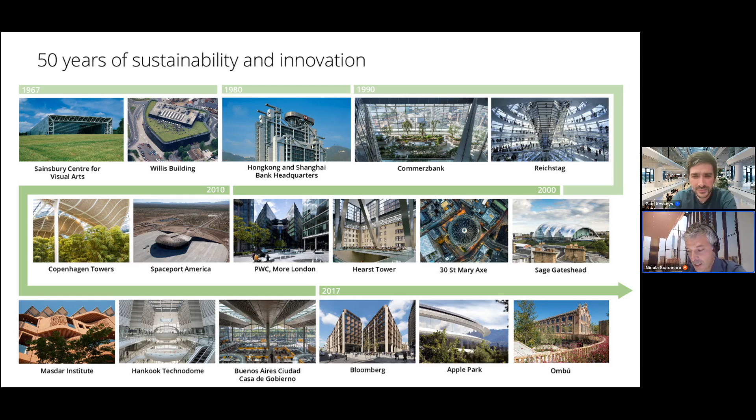Foster & Partners is a studio of architecture, engineering, urbanism, and industrial design, which was founded in 1967 by Norman Foster. Since then, the practice has been working on a wide range of projects, some of them illustrated in this small diagram here. The common thread, I will say, is that we always look for innovation, and also we always look how we can push the concept of sustainability in our projects.

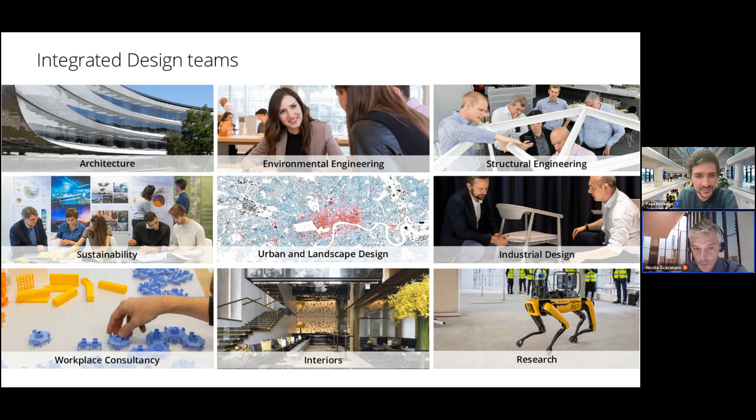Our headquarters is based in London. It's a very exciting campus. I usually call it a university almost. We have model making facilities, material research center, design studios, all sort of working together under one roof. And that's one of the key principles of the practice, the idea of having under one roof many different disciplines, because we think the best design comes from integrating design. That's pretty much the core, I would say, of what we do.

Within our offices, we've got many specialist teams, in addition to the architectural studios, that help us and support us in our daily work. It's incredible, I think, that in some project work the ideas might come from so many different directions and so many different conversations. Sometimes I would say the best conversation seems to be happening around the cafeteria with a coffee or a tea.

We have within our studios and within our campus architects. We have, as I said before, a material research center with material scientists, model making facilities, and all of this is accessible to all the architects, which I think is very interesting.

Looking at the practice, just to give you a sense of the scale, as I said, our headquarters is in London, but we have 16 offices across the globe, going from New York, Los Angeles, San Francisco, to Shanghai, Madrid, and as I said, London, where I'm based today for giving this lecture.

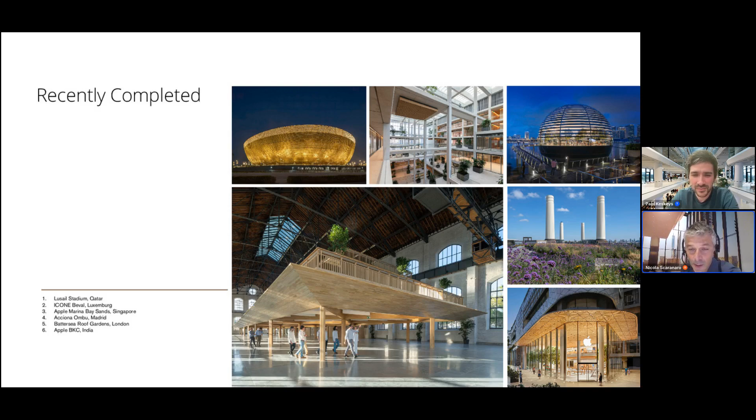Through the story of the practice, we've been working on over 500 projects. In the last couple of years we completed quite a few of these, including the Lusail Stadium - you've probably seen that in the World Cup final - the beautiful Marina Bay Sands in Singapore, the Apple stores, and also Ombú in Madrid. So a wide range of projects in a wide range of countries as well.

We have a lot of projects under construction. One in New York, which is very close to my heart, which is 270 Park Avenue, and Toronto, where we have one as well.

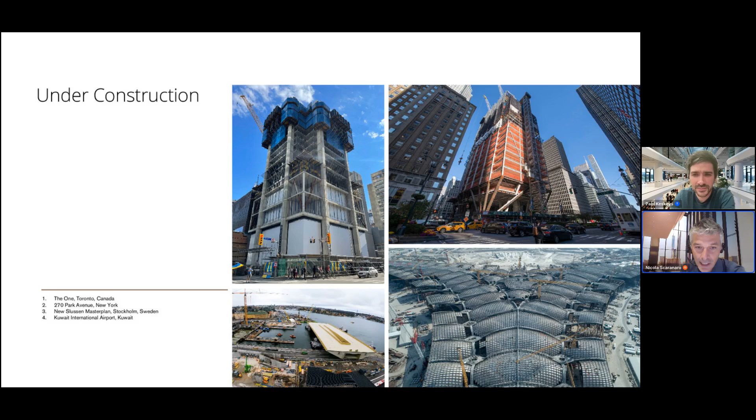And just to pick a few, we got the Slussen master plan in Stockholm, and the Kuwait airport, which is looking stunning now under construction now that the structure has been completed.

Today I want to focus on two projects to have the opportunity to go into detail. I'll show you images of the completed project, but also studies and sketches we've done throughout the process, to give you a sense of the energy and the way we work. I picked these two projects, one under construction, one recently completed, because I think they focus on three questions I posed to myself for speaking to you today.

First, how the cultural and environmental context of the building affects our design process, how we try to create a sense of place, how our intervention as architects can create a renewed sense of place or fit within an existing context, and ultimately how the project responds to its location.

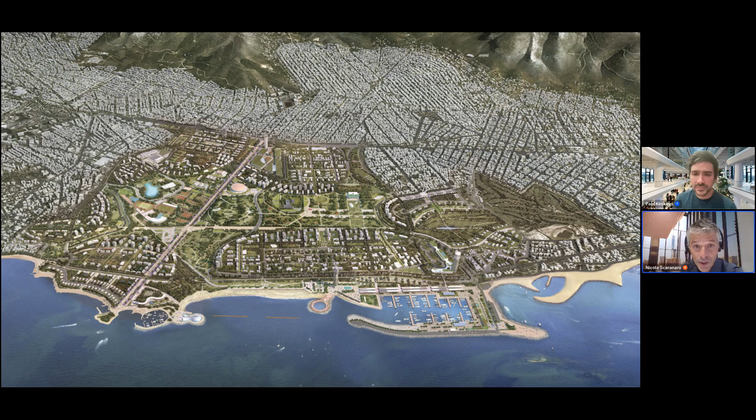Now, the idea of having a high-rise building within Athens, which is mostly low-rise, has incredible value for the project, allowing exactly what you see here: higher density, more efficient transport, and therefore more area for the public, both on the beach side and in the park you see inside.

So as we approached the project, what was our vision? We wanted to be inspired by the connection between the land and the sea in this incredible location, very close to the mountains of Athens, just in front of Aegina Island. We also wanted to be inspired by the Mediterranean color and quality of light, which generates very strong shadows and beautiful hues during the day.

But we also wanted to do something contemporary - we wanted to reinterpret the heritage of the city. One other thing we wanted to do, because of the connection to the marina and the sea and the view of the island in the distance, was create something that almost brought an island living style to the city.

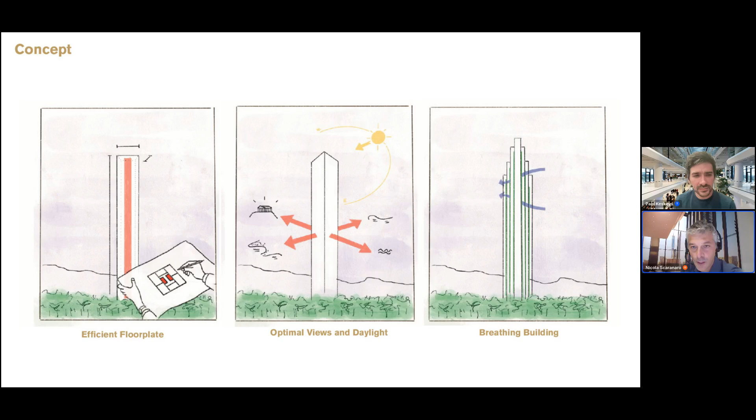So our approach was, first, to create an efficient floor plate that would create optimal views and daylight. So we rotated the massing with respect to the master plan, then started sculpting the floor plate to create what we call a breathing building - one that could open to the outside, but also have a dual aspect for every apartment within the tower.

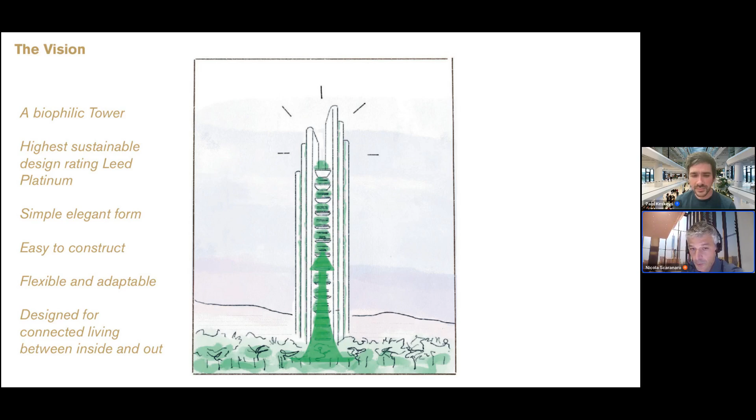Most importantly, because this tower is part of a great master plan, we wanted to create something that became the embodiment of the key principle of the master plan - the idea of creating a green park, a green spine, something that promotes the idea of wellness and biophilia, and the principle of sustainability, which I'm going to run you through.

And this was one of the images we developed for the detailed design of the project. As you can see, this idea of creating a spine running through the building really translated into creating almost a cluster of towers connected together by these bridges. For people who have been in Athens and know the way of living of Athenians, it's incredible because it really blurs the boundaries between what is considered inside and outside.

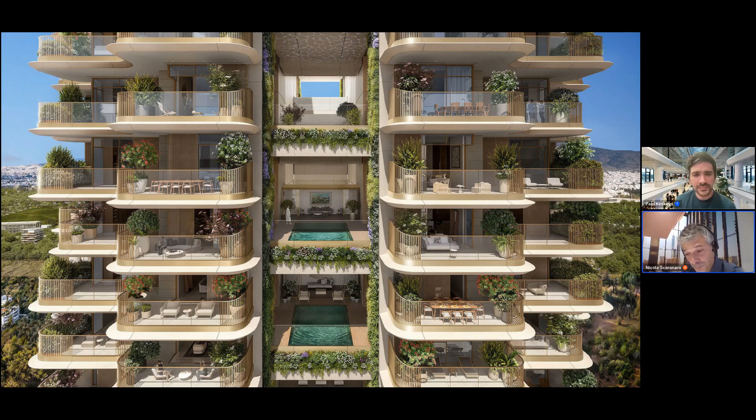Along this building, we created a series of sequences of terraces, which almost become outdoor living areas used during the summer. For us, it was very important then when developing a building.

We created something that responded to a few key parameters. First of all, since this is a quite tall tower, we're talking in the range of 200 meters from sea level, we wanted to create something that mitigated the wind. So all the design of the balconies with the balustrade, done in a mix of glazing and railings, is designed specifically to take off the energy of the wind and capture the breeze, which is important to create a climate that is cool and pleasant. We say that we can create a positive microclimate.

So we did a lot of studies with our in-house engineering team to understand what we can do in terms of creating a pleasant experience. How can we create outdoor spaces that are pleasant?

Again, the solution was to look at vernacular architecture and learn that having a mix of vegetation, a shaded place, the presence of water, and understanding the position of the breeze coming towards the tower, and making the most of the height of this building, creates a low speed wind effect.

We can reduce the perceived temperature. I notice in this slide we say between 3 and 5 degrees, but actually, having done more studies, we know that in the heat of summer we can almost reduce the perceived temperature inside the spine by 8 to 10 degrees. Pretty incredible if you think outside may be 35 degrees, but when you are in this space you may feel that it's absolutely pleasant.

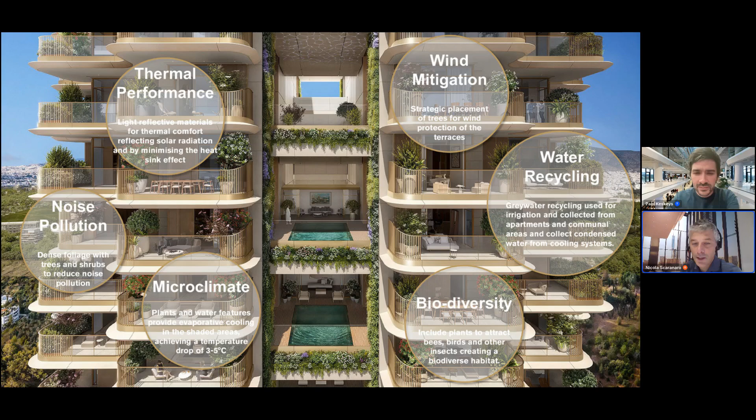And noise is very important too. We're in Athens, a very busy city, so the idea of creating these overhanging balconies that provide shade, and also the materials we use, were all designed to reduce the noise coming from the city itself. And if you look at the tower, it almost looks like a standalone tower, with no other high-rise building next to it.

So there was a desire for us to create something that looked like a cluster of towers coming together. What's quite interesting for us was the idea to create an opening between these two elements, where you can see these hanging, floating terraces, through which we can see the sky. We thought that was quite interesting in terms of the aspect too.

This organic aspect was also designed, as I said before, to manage and reduce the wind speed and actually capture the breeze where we need it.

In terms of the overall strategy, we also wanted to have something that reduced consumption. So we wanted low embodied carbon, and also wanted to reduce the overall water demand, which is critical in Athens. Something very important as well was to have a 100% naturally ventilated building.

These are some aspects in design that merge with ideas from the principle of biophilia, which we think will really promote the well-being of the people who live in this building. As I said before, since this competition was done in lockdown during COVID, something we almost forgot now, there was a very strong focus for us to promote healthy residential living.

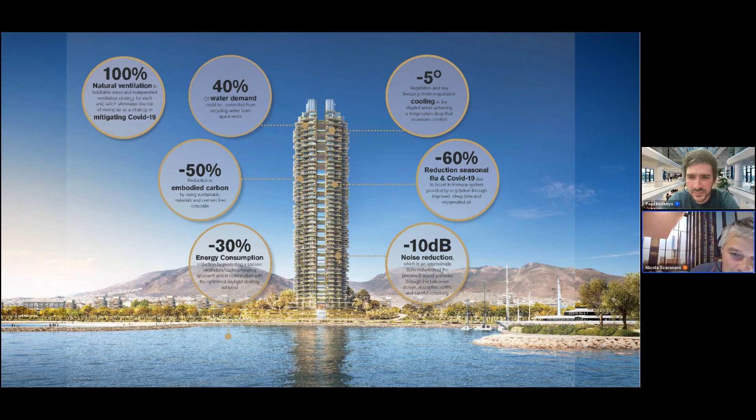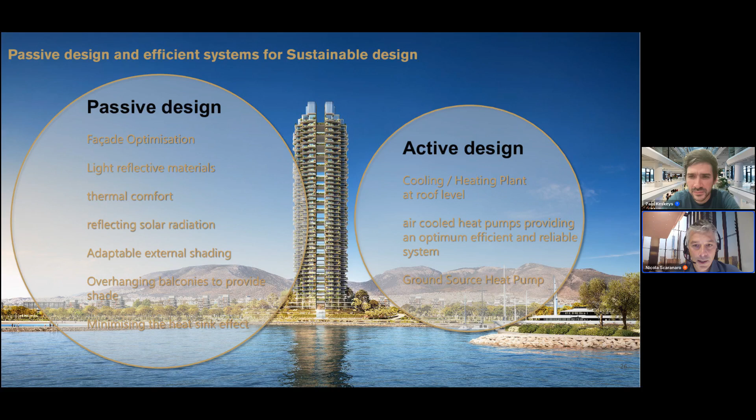And then also, in terms of engineering, we wanted to use both active and passive design to make sure that the performance of the building was as sustainable as possible.

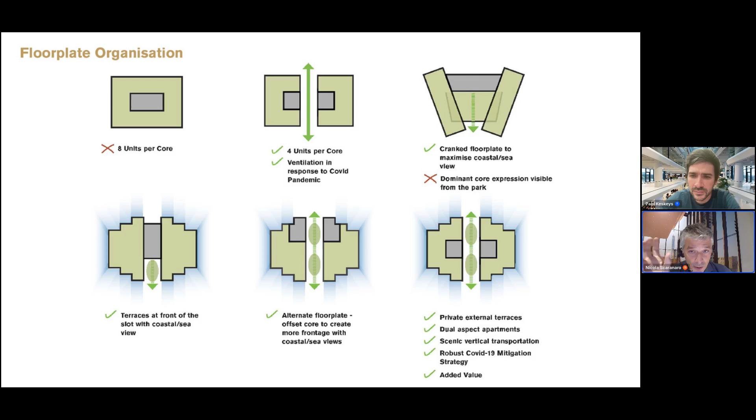The process for us was looking at different articulation of the floor plates, position of the cores, that ended up - from, I would say, the most efficient units per core shown in the upper left-hand corner - to our final layout and footprint of the building, where it provided both privacy for the terraces, dual aspect apartments, and also something quite interesting in terms of vertical transportation. This building behaves like one building in terms of fire escape - something quite important for a high-rise building, providing a high level of redundancy, so the two cores are connected. But in terms of vertical transportation and the experience of people accessing the building, they are almost two independent buildings. Structurally, this idea was very interesting to us.

Athens is highly seismic, so we wanted to create something - in terms of the footprint of the building and the structural design - that reduces the carbon footprint, the concrete carbon footprint. This idea of really maximizing the structural footprint, as you can see here with those connecting elements, really pushed us toward reducing the carbon footprint of the project.

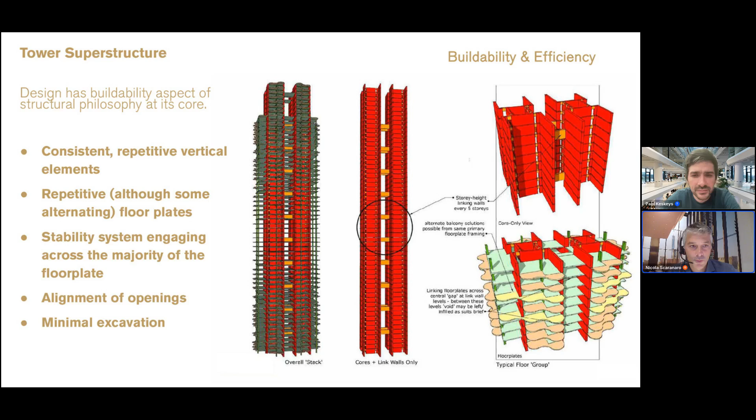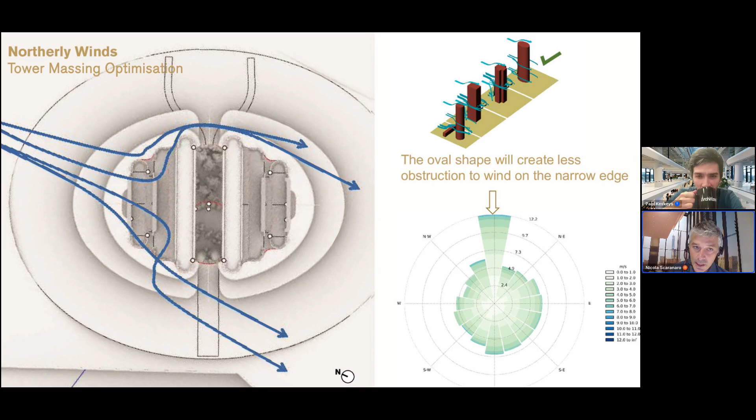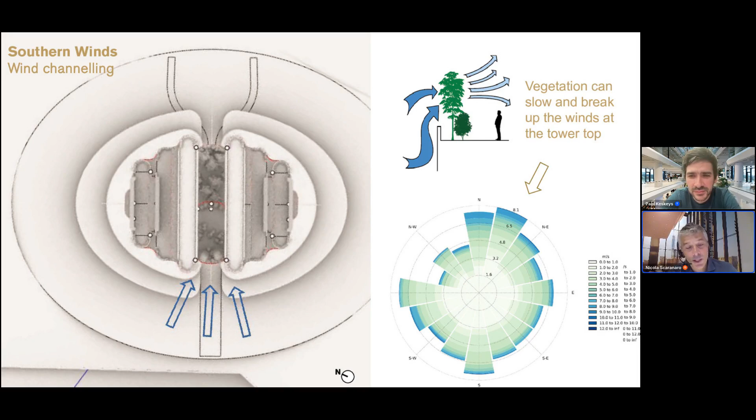As I said before, we did many studies, both desktop studies and fluid dynamics, as well as wind tunnel tests, to test not only the wind load for the structure of the building but also the comfort level at the different floors of the building. Athens is quite lucky because it's a coastal city which doesn't have high humidity, so capturing the wind and the breeze was something we realized very soon would be positive for comfort.

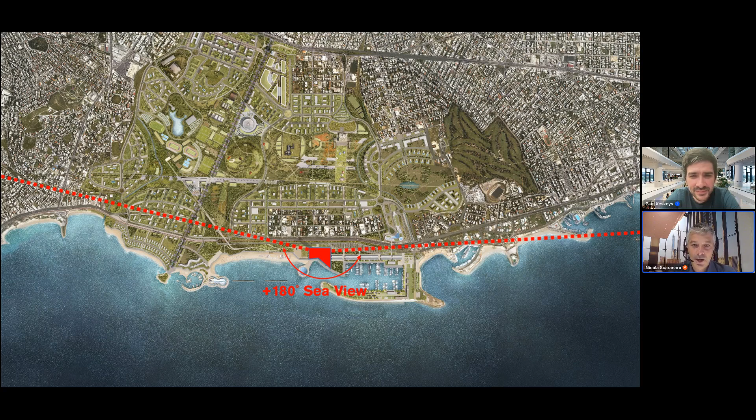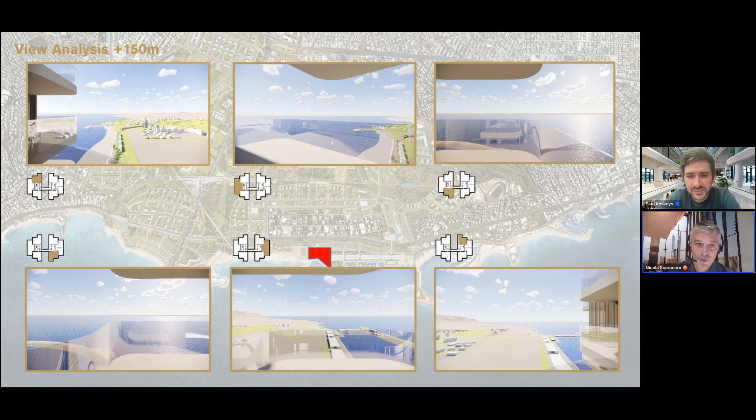Because of the position of the building, which spans almost 180 degrees across the coastal front of the city and also faces the mountain and the Acropolis at the back, the idea was to maximize the views across the city itself from the different rooms and living rooms of the apartments.

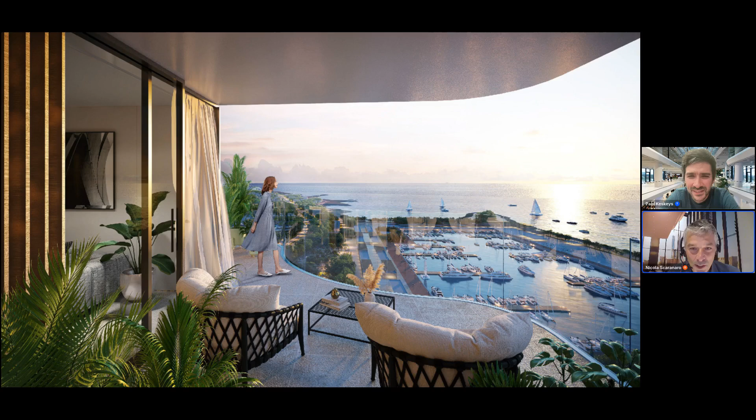Here are some early images we did using real drone footage, and you can see how incredible the city of Athens is - on one side the turquoise color of the Mediterranean Sea, on the other side the dark color of the mountains and rocks, with the city of Athens, consistently white, almost organically growing on the mountain itself.

Just next to our project is a beautiful marina, and we wanted to create a visual connection with the marina itself.

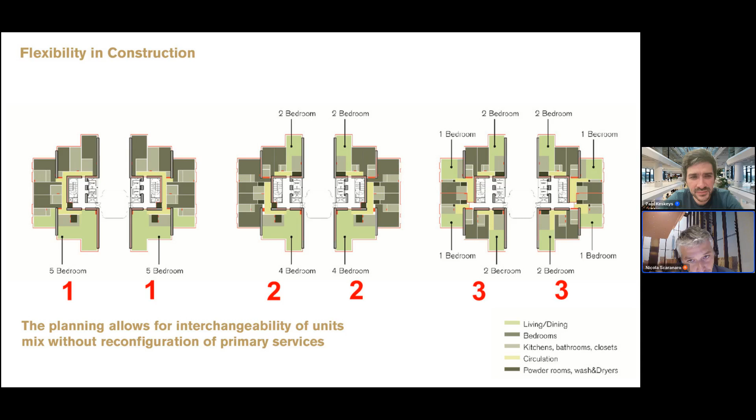It's important that when we think of our building, we don't just think of it on day one, but consider how it could adapt to different needs in the future. So it was very important for us to create something flexible in construction, with the possibility to change or combine units. We wanted to create something that could adapt across all courses of life - apartments that could be adapted for senior living as well. Flexibility in unit mix and design was incredibly important to us.

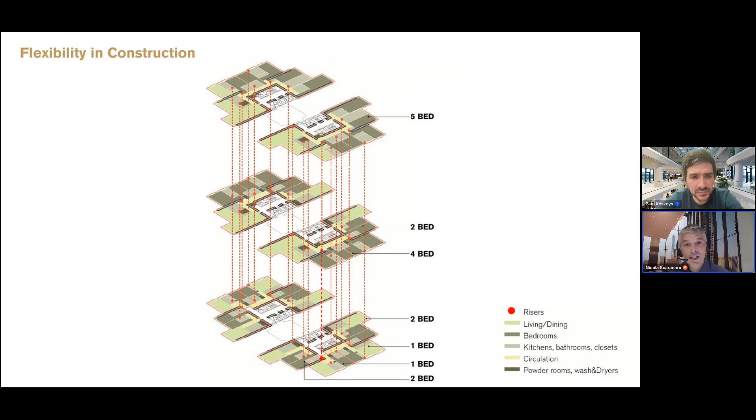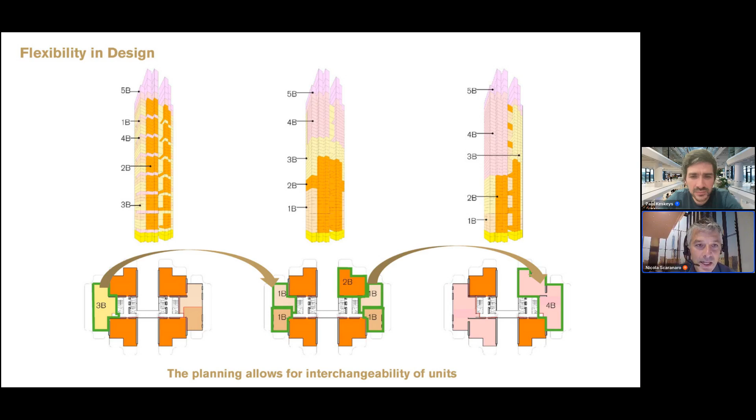It was also very important not to create a series of stacked units that were all the same, but to mix them. We wanted larger family units of four bedrooms, mixed with one-bedroom and two-bedroom units, or larger units taking up the full floor, creating a very interesting stacking mix. As we designed through this, and based on the market's reaction to our design, we were able to adjust the building in different ways to create an interesting mix.

If you go to the typical floor plan, here it is. As I said before, you can see two sets of stairs connected with bridges, linking the cores. Those bridges also work as linking beams that help connect the two cores structurally. You can see the shear walls extending to create a very solid footprint.

We can resist the seismic loads for the building itself, and then a two separate core in terms of lifting and goods lift, serving each half of the floor plate.

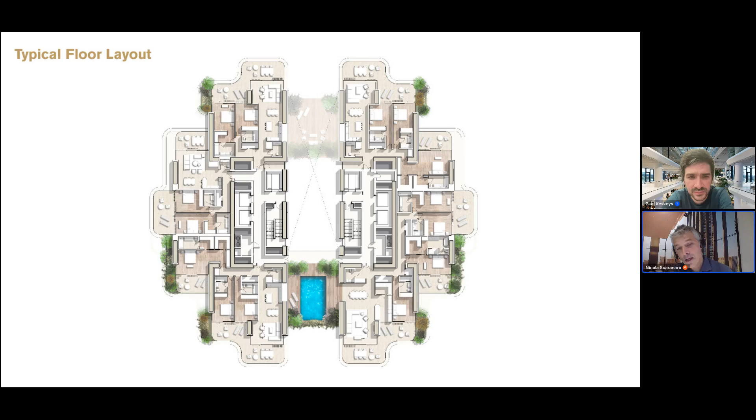This is a floor plate where you can see a mix of 3-bedroom, 4-bedroom, and 2-bedroom units, but some of these units themselves are entire half floors or even full floors, which are quite exciting.

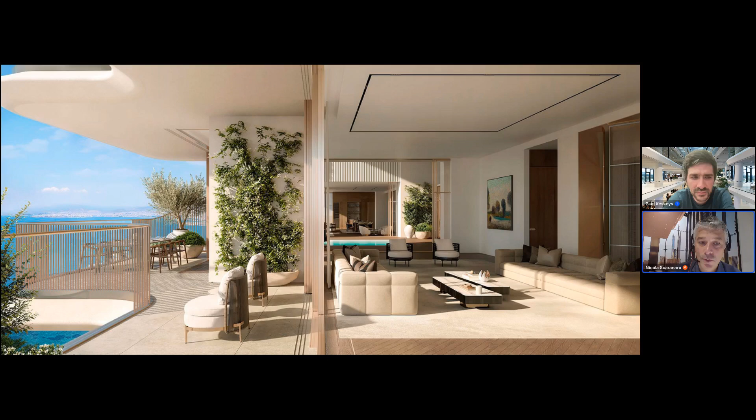One key design principle was to create something that could blur the experience of being inside the building versus outside. All windows—the building is very solid because it's important to the performance of the envelope—but towards the views of the sea and mountains, we created beautiful triple sliding doors which completely open up to blur the inside and outside.

This ensures natural ventilation is maximized throughout. This is a view looking backward at the central spaces floating in the center of the building. The idea was to create a very strong connection with these plunge pools to the Mediterranean Sea beyond.

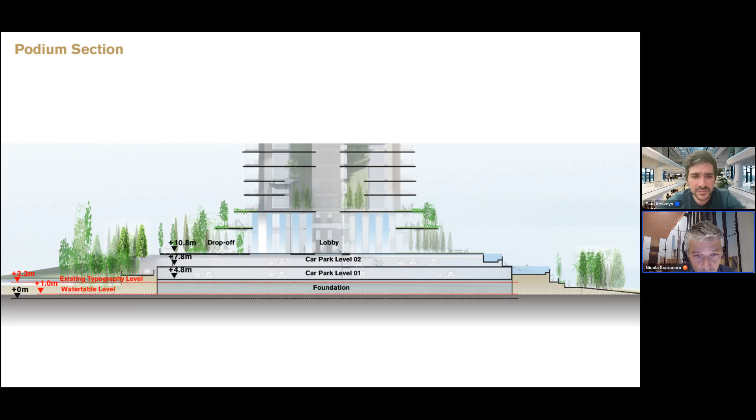The building sits within these wonderful master plans, very close to the beach. What we wanted to do here was reduce the excavation of the building, raise the car parking level to ground level, and this gave an opportunity to have the lobby level at plus 10 meters above sea level—which we thought was great for creating an opening, a spine in the center of the building, all the way to the arrival experience for residents and guests alike.

As you can see here, you are elevated, so you get a view directly towards the sea, and to the left and right you have the lobby dedicated to your portion of the tower. Also on this floor, we created a series of amenities—resident lounges, gyms, small business centers, and a swimming pool area.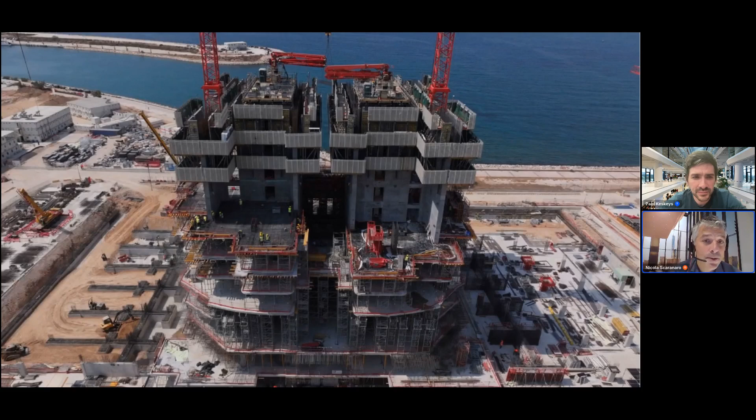Again, you get a very strong connection to the outside and to the landscape all around the tower. This is in construction, due to be completed in 2026, so quite soon. This image was taken a month ago on site, and you can see the building has almost reached the 8th floor.

It's quite interesting—despite having worked on this project for many years, every time I look at pictures or go on site, it's the proximity to the sea that strikes me. It really feels close, and sometimes you see boats just passing by the building, which is phenomenal.

The next project was about exploring how local culture and environment shape our building, and I hope this building in Athens achieved that. We really looked into understanding how Athenians live, the environment, and the local vernacular architecture, to create a quintessential Athenian living experience, hopefully.

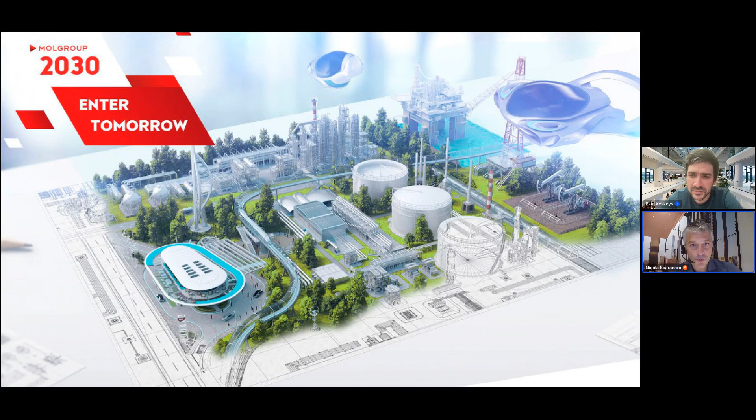This project is located in a different part of the world—in Europe, in Budapest. It's a campus project which has been recently completed. When we first approached it, there was a design competition, and when we were first approached by MOL, we thought the brief was very interesting.

MOL is a petrol company based in Budapest with a great vision for 2030, focused on investing in sustainable technology. To change the business and invest heavily in this new direction, they wanted to create an office that brought creativity and innovation together.

They wanted an office which changed the culture of working that they had.

But the building itself, apart from that fascination, what we found was most of the incredible work being done was done behind closed doors. So we thought, in a way like I described how we work in our office, where we collaborate across different disciplines, we wanted to bring that attitude of collaborative work and innovation to the new headquarters.

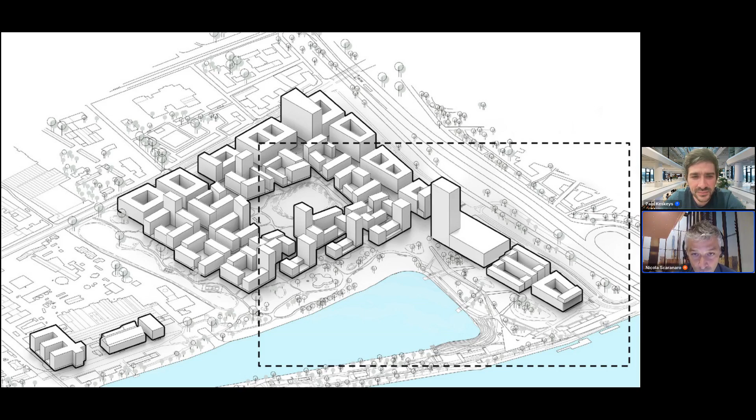This was the master plan which was created and approved for the site, given to us as a starting point for the competition massing.

What we thought looking at the site is that it was very interesting, because having such density in this specific part of Budapest is positive - there's a lot of good transport connectivity, and therefore an opportunity to reduce the carbon footprint of employees by simply placing the building very close to the transport hub.

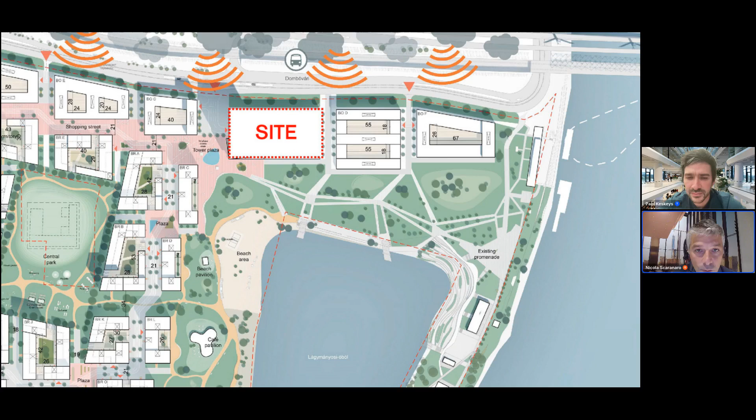That though has some issues as well. Being close to a big transport hub brought some noise from the connecting road. So we wanted to orient the building to almost create a screen, a barrier towards the noisier street, and open up toward the city and the river itself.

The other thing we wanted to explore was this idea of creating collaborative working. I personally feel that the most interesting conversations you have with colleagues might not happen exactly at your desk or in a meeting, but in different spaces across the campus. So what we wanted to bring here was a range of different amenities - a generous lobby at the entrance representing the company, collaboration spaces, gardens, a beautiful terrace on the Danube.

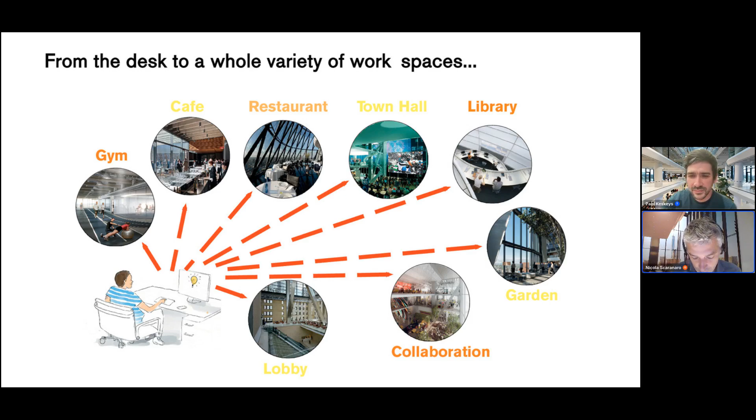We thought it would be interesting to include a restaurant, food and beverage places, a gym, a library, and a town hall. All these places could cater for different events and bring together the community, giving the opportunity to create a shared ethos.

What's also very interesting and important for us is that people are very different - some people are more introvert, some people are more extrovert, people have different needs. So we wanted to provide a range of choices for people to work.

Some tasks might require being very focused - if you're a programmer or software designer, you might need long stretches of time to focus in silence. Other tasks, like architecture, can actually be quite loud and require bigger groups for discussion.

So we provided different spaces for different tasks, but also for different types of personalities - we thought that was quite important. You can see we started stacking these spaces in this diagram, creating something that deviated from the massing of the consented master plan, to create something more fluid between the different spaces. Our initial thought process was: we have office and amenities we need to provide, so let's merge them together.

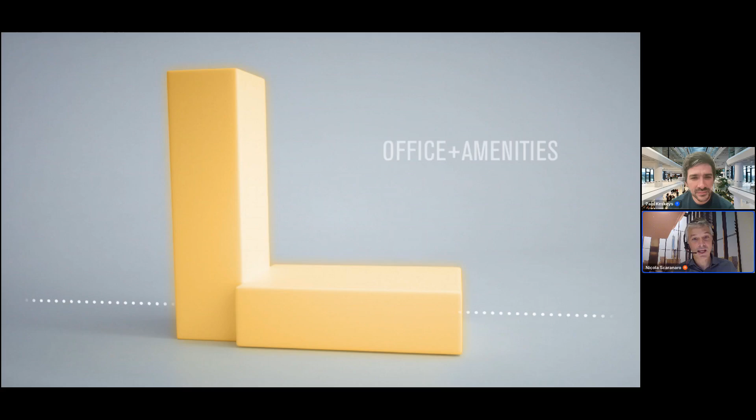The idea was also to take the core, which typically sits in the center of the building, and push it to the west. This has two benefits: one, it gives a more visually open floor plate, and secondly, it screens the western sun, which for an office building is considered rather unpleasant.

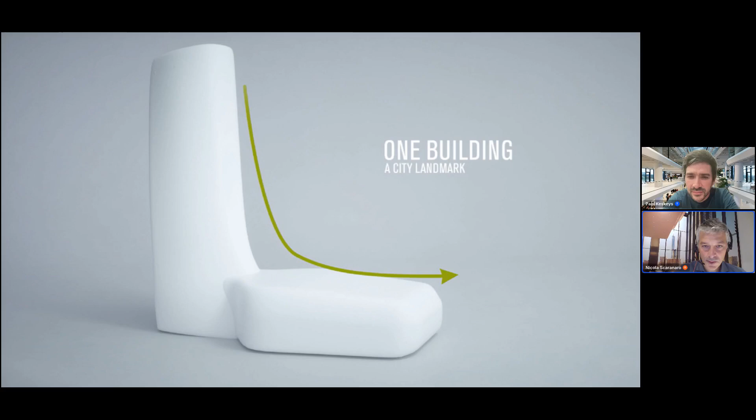We didn't want to have two buildings. We wanted to have one building coming together with this element. We thought this could become something inspired by the city landmarks. If you're familiar with Budapest, the catenary roofs, the hills in Buda, all have this sort of organic language, and the inlet where our building is situated has this nice organic language too.

Finally, we wanted to create a sort of vertical campus. So even if you sit with your team on different floors, we want to create visual connectivity across the full campus. Therefore we created these central winter gardens and this atrium which connects the different floor plates up to the top of the building, where we wanted to create a public space accessible to all.

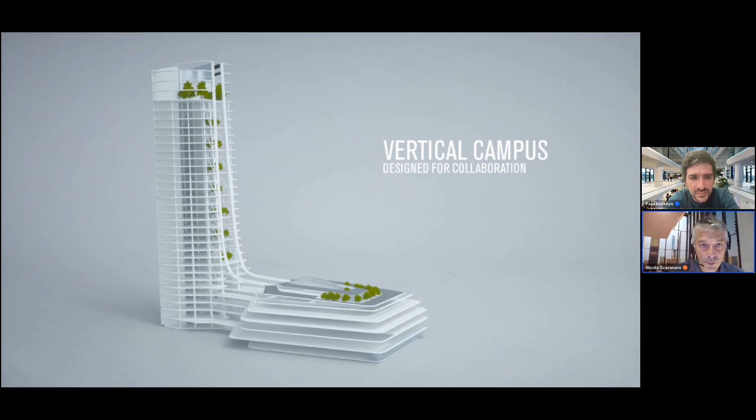Another thing which was key for us is to use these spaces, these winter gardens, to really boost the mid-season daylight and also the ventilation.

This is one of the early images we created. As you can see, the idea, as I described before, almost takes the language of this beautiful inlet in the Danube and transforms it into a vertical expression of this building. Then we have this green series of spaces that come to the terrace at the very top, which is open to the elements.

Looking at the distribution of spaces, you have a more typical floor plate, approximately 1,200 square meters, which sits in the tower, versus something quite unique - a working space in the low-rise portion on the podium of the building, with this big atrium coming through.

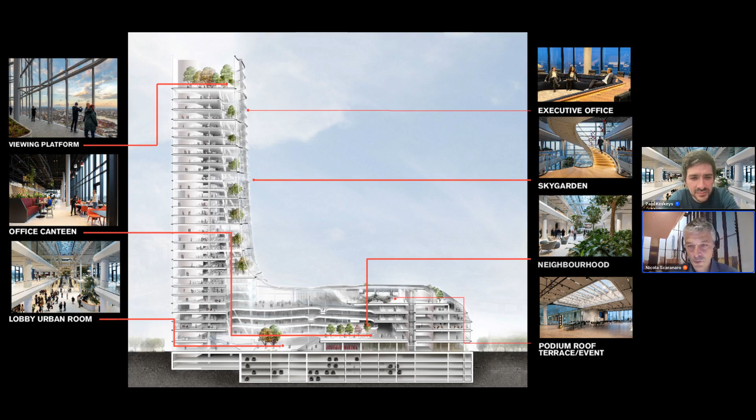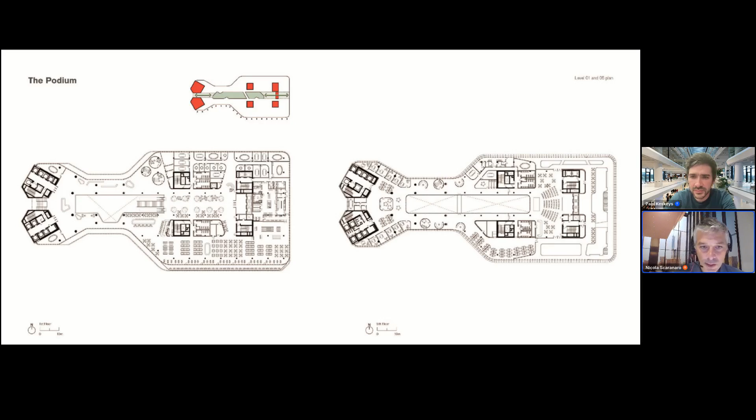Looking at some of the plans, just to give you a sense, you can see the dimension of the atrium in relationship to the floor plate, and the idea of creating the darker spaces of the floor plate - places like the town hall, event spaces, and some meeting rooms - towards the north, where we've got the noisy road, and putting the canteen and open places toward the south, with a great view of the river and better daylight.

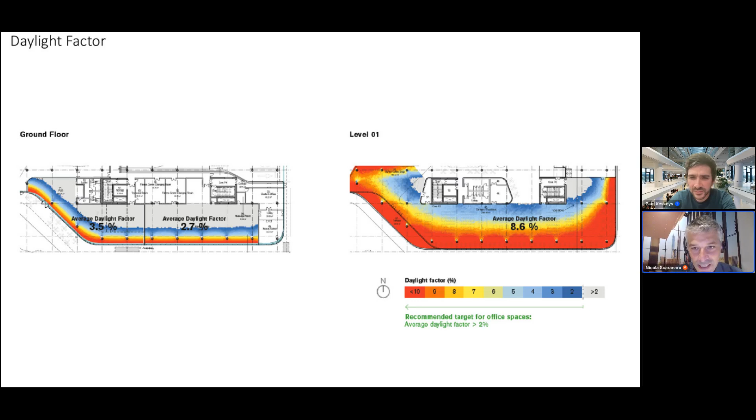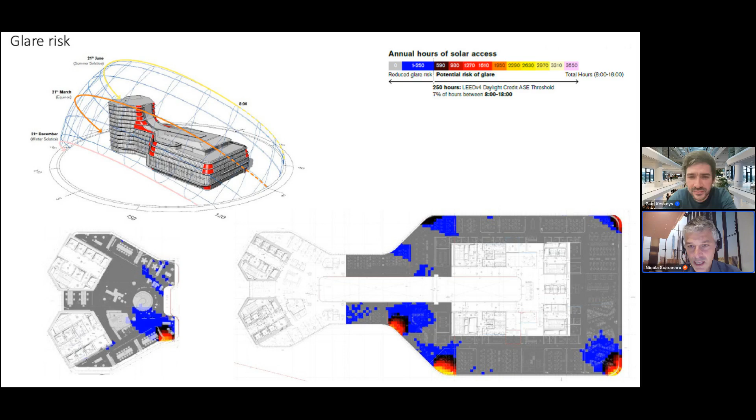Daylight is important, obviously, especially in this part of the world. Great care was taken in designing this floor plate in terms of size, proportion, location, and facade that really maximized access to daylight, while at the same time reducing to the minimum the risk of glare, which is something office design seems to suffer quite a bit from.

Something quite interesting for us, as I said, was the idea of offsetting the core and splitting it into an offset split core, because our structural engineers were very happy with this design - it gave a lot of stiffness and created a good center of mass.

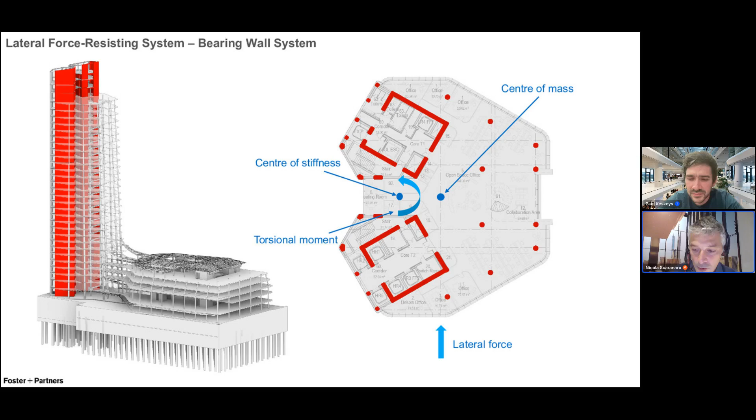As architects, we were very happy too - if you look at the image, there's east and west visual connectivity across the full floor plate. You also maximize the potential for flexibility, because you have a large area at the center of the floor plate where you can design to cater for the different needs of different departments.

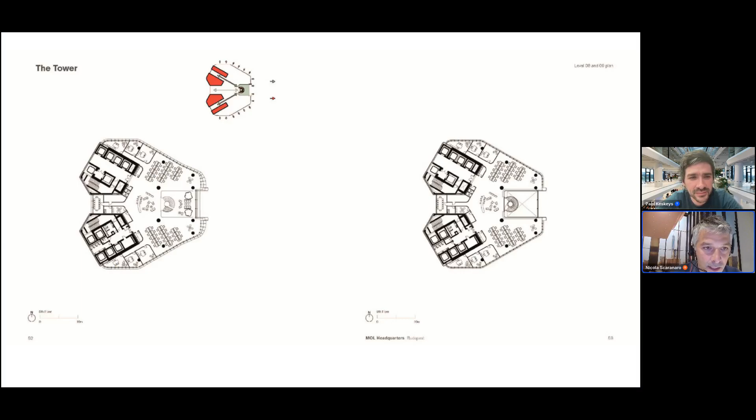This was the first model we did. As you can see, the horizontal expression was required to mitigate solar insolation in the summer, and then the expression of these two cores on the western side, in a split arrangement. The floor plan of the tower, and some test fit studies, just to prove different seating arrangements.

And here again, I talked before about the concept of biophilia. We know there's a lot of data on how providing an office with good daylight, good air quality, and access to organic design with the presence of vegetation can really boost productivity. How do we measure boosting productivity in the workplace?

Well, it can be measured by innovation. It can also be measured by understanding sleep patterns of people—people who sleep better, more rested, take less sick days. If we design a workplace with this in mind, we can create a place which people connect with, that's pleasant, and promotes the wellness of your company.

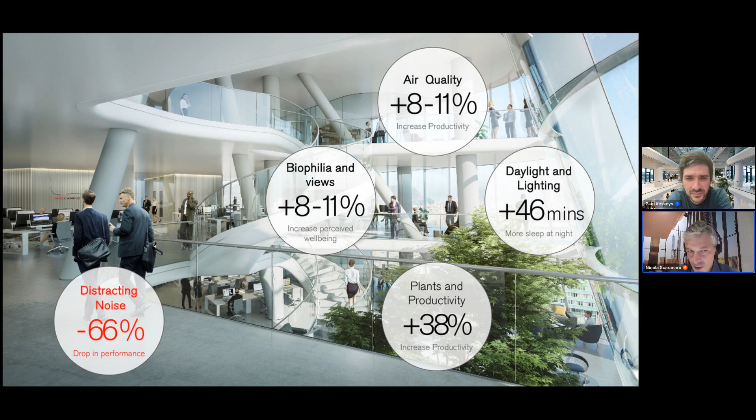And on the other side, open spaces are wonderful, we like them, but at the same time some people might be distracted by noises being created, and we know this creates a drop in performance due to distractions. So within this floor plan, we create special areas where people can have a quieter experience for quiet tasks.

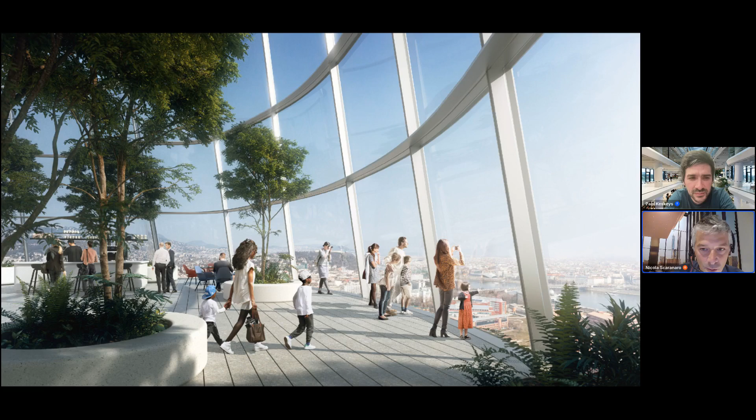And this is some early views of the viewing deck on top of the building, where you can have a great view across the river to the beautiful city of Budapest.

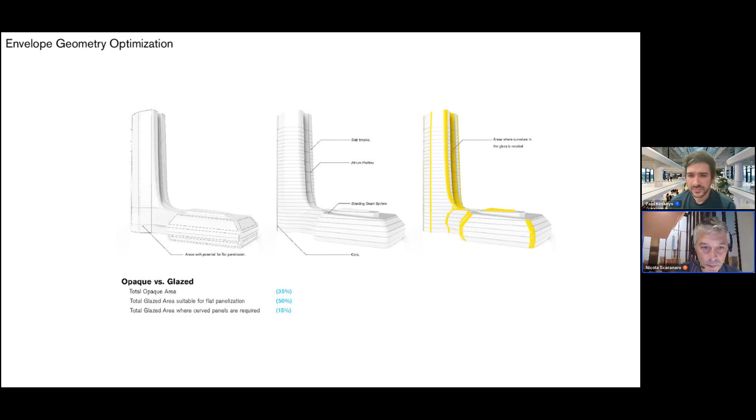The process was not as simple as that. Of course, it took the work of great engineers, fantastic local architects we worked with, and very open-minded clients to really create something optimized in terms of design, trying to maintain the spirit of this organic design, but doing that in an efficient way.

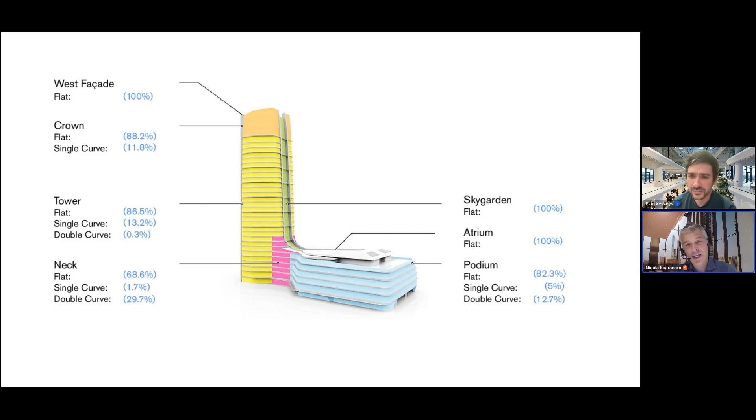So a lot of study was done together with our specialist here, FMP, to understand how we could realize this building with a minimum amount of curvature and still preserve the design intent we showed you before.

A few images of our studies showing almost one of the most critical elements, the connection between the podium and the building, almost a bridge connection between the two.

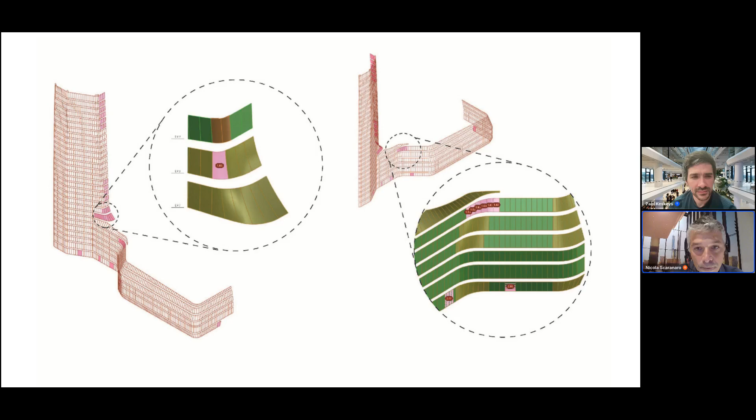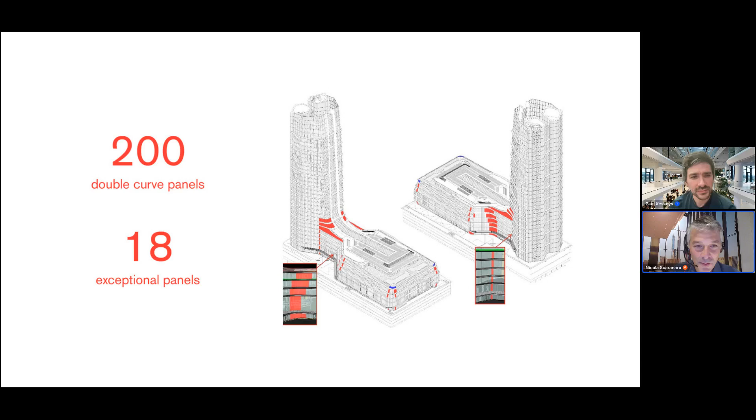And the panelization study, which was done through some software analysis by our team, where we managed to reduce, through this process, the amount of panels from pretty much every single panel being a double curvature panel, down to only 18, by the end of the detailed design.

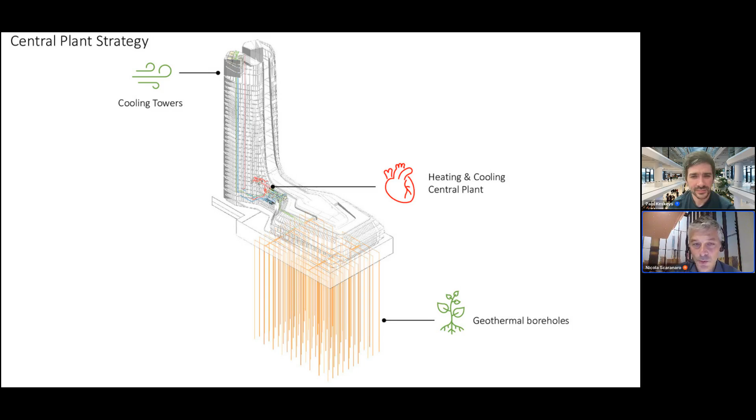And in terms of sustainability, this is a project which achieved LEED Platinum and also BREEAM Excellent, through the use of different low carbon technologies like geothermal boreholes—because of proximity to the river this was very efficient—having a centralized cooling plant, and using the expression of this core we looked at before as an opportunity to get some free cooling through our cooling towers on top of the building.

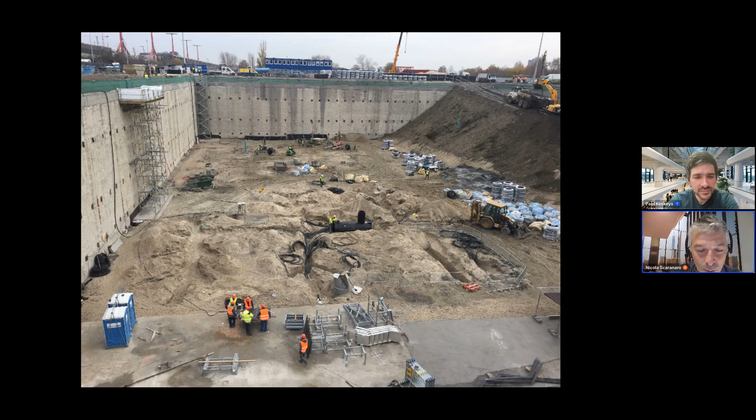And as I said, this is a process of great patience and great collaboration. So you can see from some of the BIM models from our mechanical engineers, some images of the site, where the boreholes were first installed, and as you can see, the ground source heat pump.

As I said before, the top of the core serves as the location for our BMUs and also our cooling towers. But most importantly, this is a terrace which is open to the public. People can access it and have incredible views of the city.

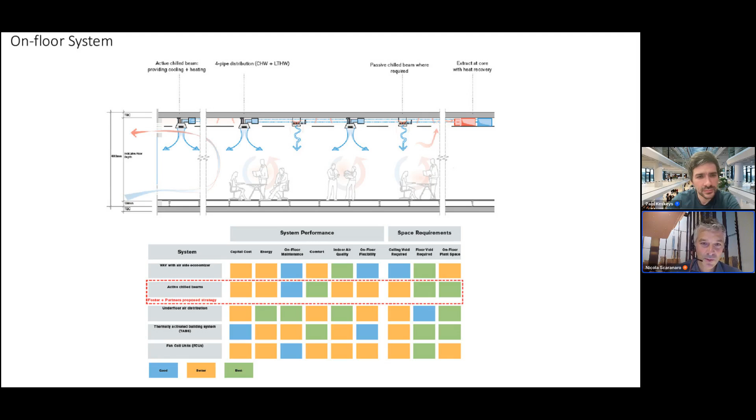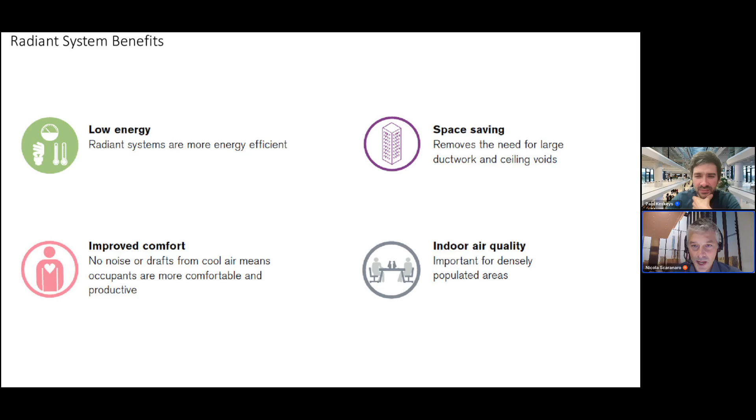In terms of the design of the building, something you saw in all our images was the idea of creating a bespoke system, a radiant ceiling system. We liked it because it maximizes the floor to ceiling height, creates very good indoor air quality and comfort, and also was low energy. We also liked this almost industrial looking design.

So if you're sitting looking straight up at the ceiling, you'll see through all the ducts and the structure of the building. But when you have a long view of the building, it gives a quite coherent, consistent image. These little pipes of water are used for the radiant heating itself.

It's very interesting, so I want to show you a video of the post-occupancy of the building - how people finally occupy the building and how they experience it with the different spaces we created. What's so interesting is that you never know how people will use your building.